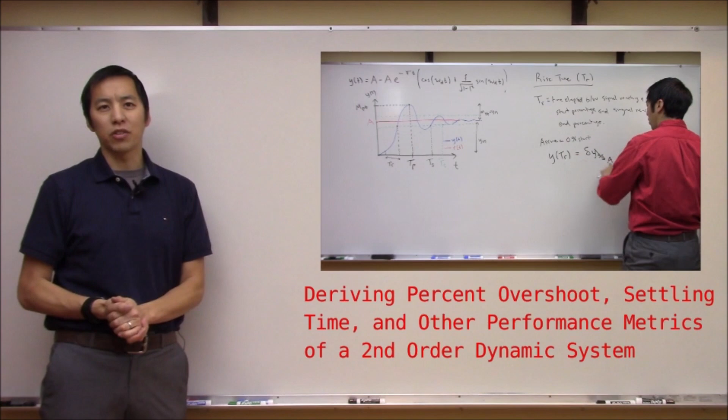of a dynamic system. If you've been following along with our series on controls, then you know that one of our previous videos actually discussed in detail the concepts of percent overshoot, settling time, etc. Therefore, if you haven't had a chance to watch this video already, I would recommend you stop, watch that video first before continuing with the lecture today. So, if all of this sounds good to you, why don't we jump over to the whiteboard and get started.

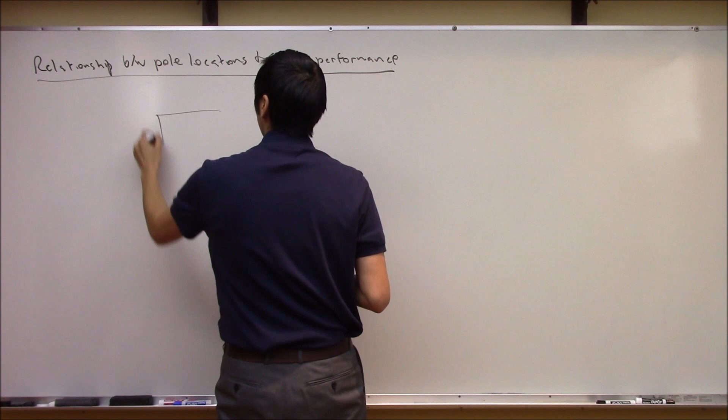Alright, so like we said here, the goal today is to discuss the relationship between pole locations and system performance. So the picture that goes along with this is, let's say you've got some plant here, or some dynamic system, maybe let's call it G of S, right? And there are some inputs here, U of S, and some outputs, Y of S, or time, whatever. If you want to look at this in the Laplace or the time domain, it doesn't really matter. But conceptually, what we see here is this system has poles here, right?

And if we were to plot these poles in a real imaginary plane here, in this complex plane, we understand that, depending on where the poles of this system are, they sort of affect the performance of this system, or what the output of this system does. So for example, if you had a pole here on the real axis, but in the left half plane, we know that thing is stable. And if we were to plot, very roughly, y versus t, we know that it would probably sit here and decay, right? And if the pole was even further in the left half plane, for a similar input, you would also get a decay, but it would probably decay faster, right?

Likewise, if the pole was, for example, exactly on one of these imaginary axes, let's say you had a pole right here, we know that the response associated with this would be something like pure sine waves, right? And as you move further down the imaginary axis here, or farther away from the real line, the same thing, you'd still get these cosine and sine waves, but they would now oscillate faster, right? And heck, we can combine this sort of behavior. Like if a pole was located over here, we would notice that you would get a decay, but you would get it in an oscillating fashion here, right? So this thing might look something like that.

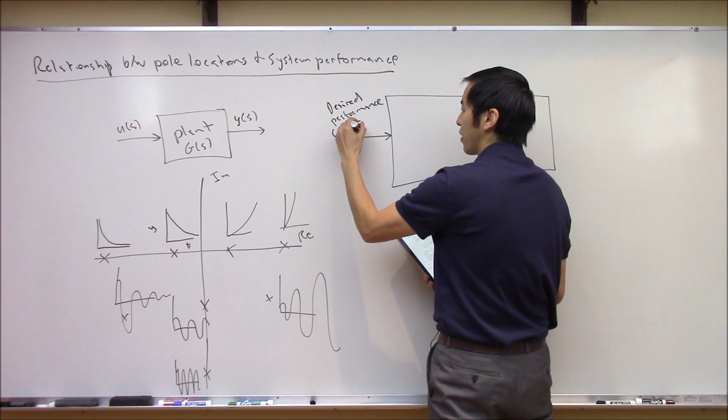So for example, your manager could come in here and say, you know what, your system had better have a specific percent overshoot, a specific settling time, a certain damped natural frequency, etc., right? These are all parameters or performance metrics which are easy to understand, what they do and what they actually physically mean. If they specify a certain percent overshoot, you know exactly what that system looks like, rather than this sort of hand-waving rough idea of how the system is going to respond, right? So these are high-level requirements that a customer or a client or a manager might specify to you. And what you need to do at the end of the day is be able to say, all right, if these are my requirements, what kind of requirements or restrictions are on the poles?

So in order to achieve this type of performance, you better make sure that the poles end up in a certain area, right? And this is what I'd like to talk a little bit about today. So you might think about this box here as basically transforming high-level requirements to technical requirements, right? So let's maybe write that down. So this is transforming

high-level requirements to technical requirements, right? So this is something that a customer might specify or a manager, and here's something that an engineer can deal with, right? So the reason why this is helpful, right, is because once you have this requirement on the

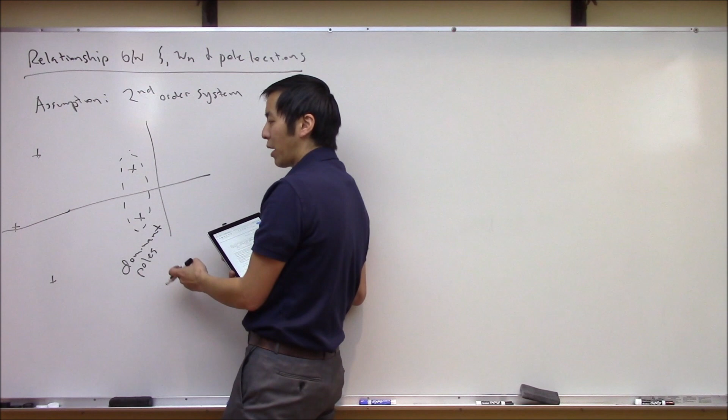Heck, even if it was a more complicated system here, right, where you had poles, and then you had more poles out here and things like that here. This might be, in this case, like a fifth order system that I'm drawing here. But if you think about this long enough here, a lot of the behavior is dominated by sort of these two dominant poles, which are closer to the imaginary axis, right? A lot of the dynamics associated with these poles, since they're so far in the left half plane, they're going to decay and settle very, very quickly. So a lot of the interesting behavior can be modeled by just a set of two simple poles here, right? So this is just a slight side note to say that this assumption is not as crippling as you might expect here, and a lot of systems can follow this analysis here.

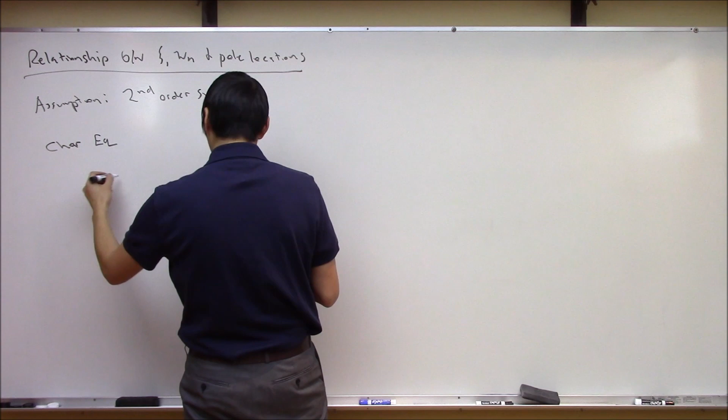So let's assume that we have a second order system. In other words, the characteristic equation for this thing can be rewritten in our standard second order form. I don't care what kind of second order system you have. You could manipulate it to basically look like s squared plus 2 zeta omega n s plus omega n squared is equal to 0 here, right?

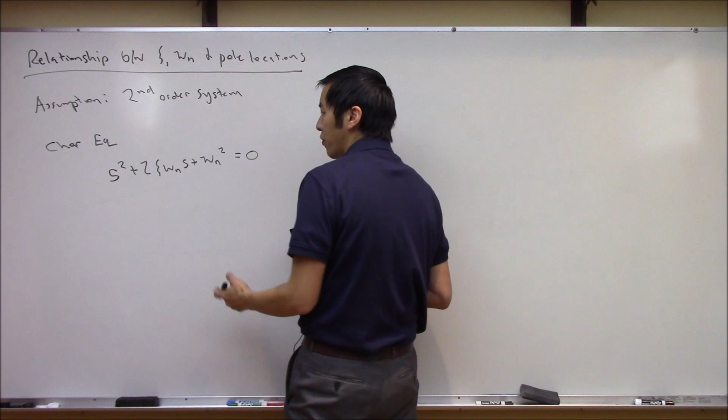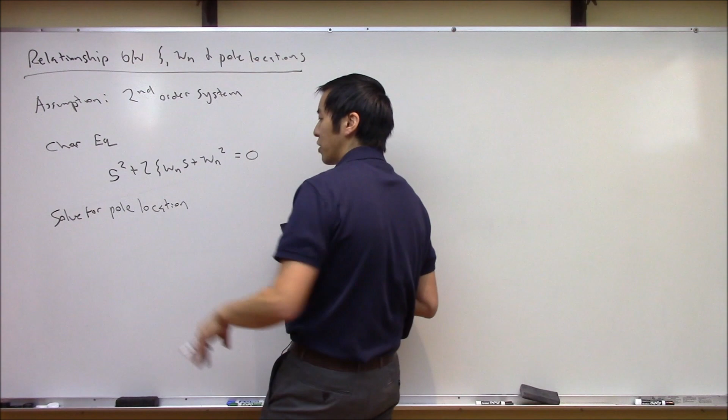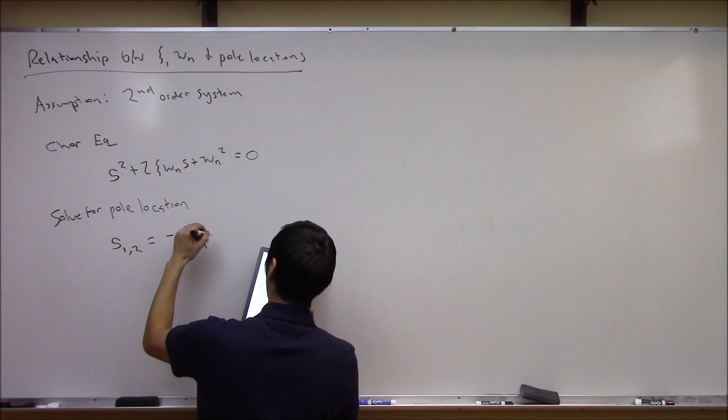Okay, so let's just go ahead and solve this thing for the location of the poles. I don't know how you want to do that. If you want to use the quadratic equation, or run to Mathematica, or do something like that. And we basically end up with two locations for poles of this system. Let's call them S1 and 2 here. You're going to end up with negative zeta omega n plus or minus omega n square root of zeta squared minus 1.

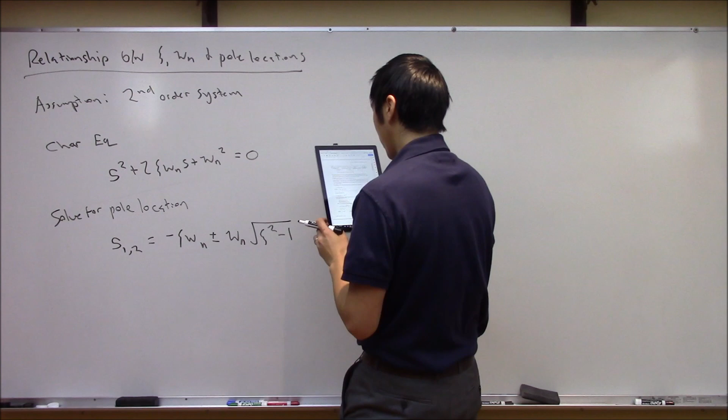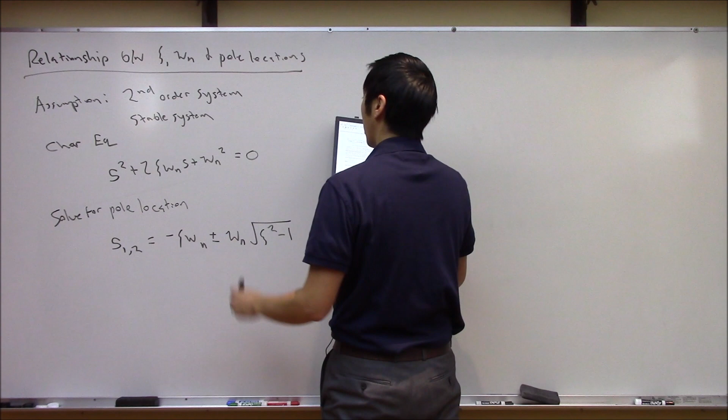All right, let's go ahead and add to our list of assumptions here. How about let's just deal with stable systems for now to make our life a little bit easier, okay? What stable implies here is that we're basically going to have to ensure that the combination of zeta and omega n is in the left half plane. So basically the magnitude of zeta and omega n is positive here. Therefore, the real part is going to end up over there in the left half plane.

Okay, and furthermore, let's go ahead and assume here that, shoot, I ran out of room in our assumptions. Maybe we should have put some bullet points here. Here's another bullet here. Sorry, this is not using the whiteboard space very efficiently, but let's go ahead and assume that omega n is greater than 0 here, and zeta is greater than 0 here. Well, tell you what, let's leave it like this for now. This should be fine, okay?

All right, so if that's true here, what we can do is rewrite this a little bit. We could write this as minus zeta omega n plus or minus omega n times square root of 1 minus zeta squared times i. All I'm doing is flipping the order of this, which pops out a -1 here. You can see that square root of -1 just turns into an i here. The reason we want to write it like this is because let's call zeta omega n sigma, the real part of this pole location. And finally, let's call omega n times square root of 1 minus zeta squared omega d, or the damped natural frequency.

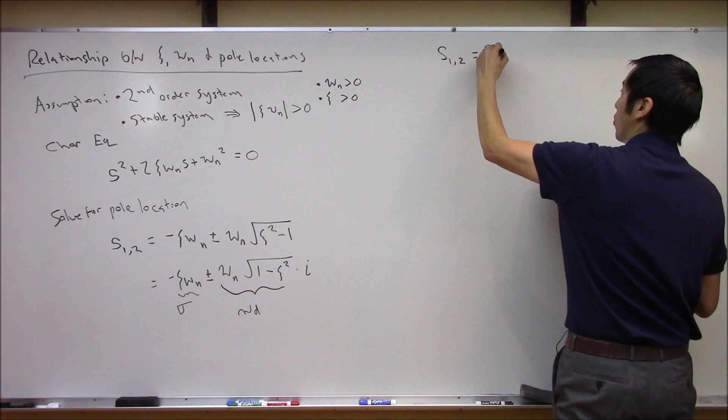So really what we end up with here is the pole locations S1 and S2, or some people refer to these as lambda 1 and lambda 2 for the two eigenvalues of your system. This thing could be written as just minus sigma plus or minus omega d i here. So in this case, like we said, sigma is just the product of the damping ratio and the natural frequency, and omega d here is omega n times square root of 1 minus zeta squared, right? Okay.

Okay, so graphically here, if we were to plot this in the real imaginary plane, so here's my real and here's my imaginary section. If I had two poles, let's draw them as x's, something like this, we see that this portion here is going to be at minus sigma, and then up here is going to be at omega d. So, again, you could kind of visualize this here.

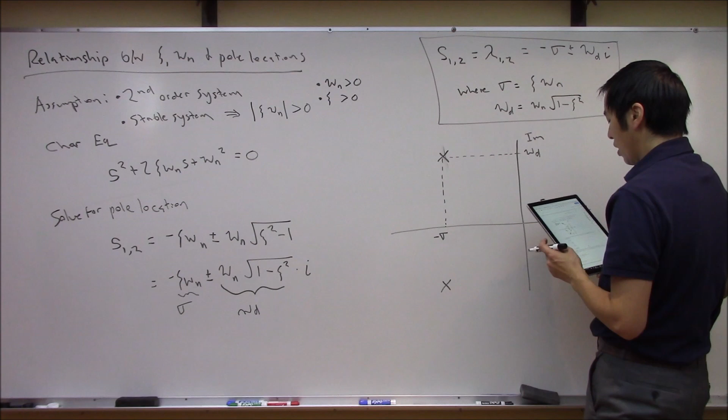Why don't we go ahead and draw a line here between the origin up to this pole, and we could think about extending this line maybe even a little bit further here. So what we might want to consider is that there's an angle associated with this. Let's call this angle theta here. So what I want to do is consider pole locations along this line at angle theta here. Maybe let's write that down over here.

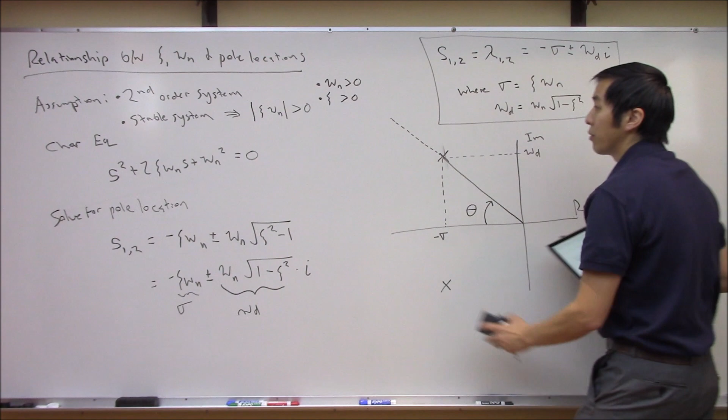Okay, so let's consider poles along a line with angle theta. If I look at any pole on this line, doesn't it satisfy the relationship for the tangent of theta? What is tangent of theta? Tangent of theta is the opposite over the adjacent. Well, what's this opposite side? You can see this opposite side, or the distance here, is omega d.

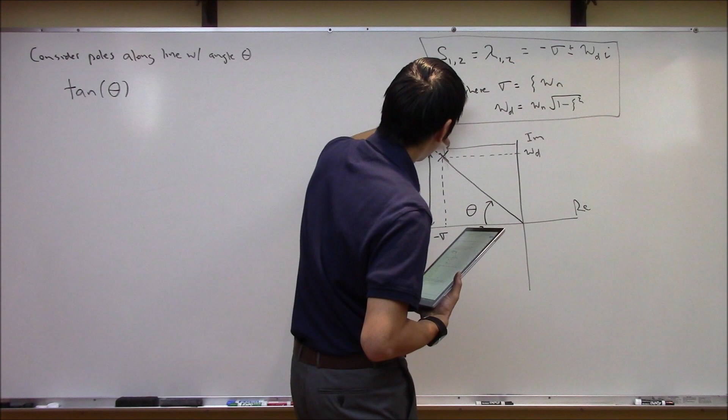And the adjacent side, or this length here, I guess it's easier to visualize if I draw it down here. This length here is just sigma. So tangent of this angle is just opposite over adjacent. So this is simply omega d over sigma. Plug in our expression for omega d, which we said was omega n times the square root of 1 minus zeta squared, all over our expression for sigma. Sigma is zeta times omega n.

So look at this, the omega n's cancel, and we end up with the square root of 1 minus zeta squared, all over zeta. This is equal to tangent theta. Or if you want to look at it this way, theta is just the inverse tangent of this thing. So we could also write theta is equal to tan inverse of the square root of 1 minus zeta squared over zeta. And hopefully some alarm bells might be going off in your head.

Usually when I see an inverse tangent, I always think about atan2 versus atan. Hopefully everyone is somewhat familiar with this concept of a four-quadrant inverse tangent versus a simple inverse tangent. In this case, I think a simple inverse tangent is going to work if we just look at things between 0 and 90 degrees. But if you want the entire spectrum of a full 360 degrees, you might need to be thinking about an atan2 instead of atan. But I think that's a little bit outside the scope of our discussion. All we're trying to understand is that you end up with this relationship.

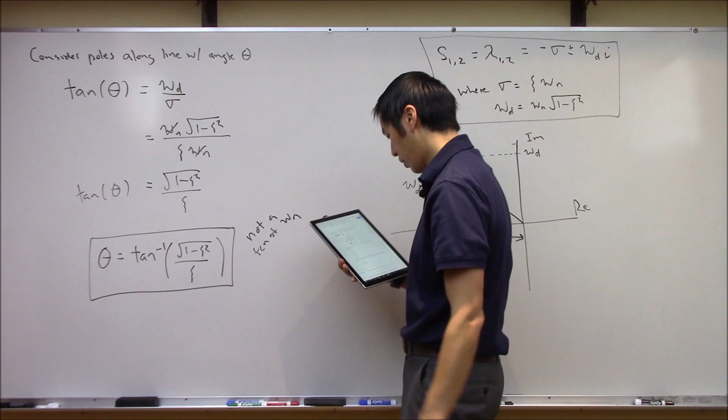Okay, so maybe we should box this up, and think about what this actually means. If you look at this long enough, what's interesting is this is not a function of omega n, not a function of natural frequency. The other way you can look at this is it's basically saying that any pole that's along the line theta has the exact same damping ratio. So maybe we should write that down right underneath it.

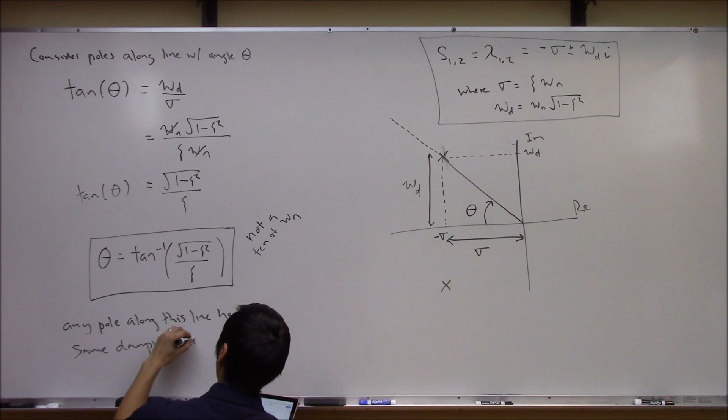So what's interesting about this is that any pole along this line has the same damping ratio, zeta. Or you can think about it the opposite way too: if you want a specific damping ratio, that is going to dictate an angle. So let's look at a quick example. Maybe we'll leave this picture up a little bit. Let me see if we can fit in an example here. What if you want a zeta of 0.707, which is actually 1 over root 2,

Okay, so that's interesting. Let's take this one step further, in the sense that we could now link this to percent overshoot. So maybe I've got enough room over here. Let's now talk about how to relate this to performance metrics. If you recall from our last lecture, the percent overshoot of a second order system is 100 times e to the minus pi zeta over the square root of 1 minus zeta squared. And what was also interesting about percent overshoot is that it is not a function of omega n. It only depends on the damping ratio.

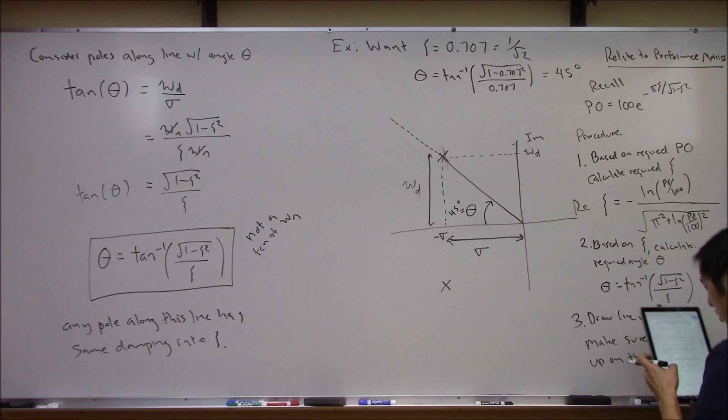Great. And then once you have that, step three is just draw this line. So draw a line with angle theta, and make sure that whatever controller or system you have, whatever way you have to move the poles, the poles end up on this line. So based on the percent overshoot, that places some restrictions on where you can be in the real imaginary axis.

What about settling time? Is there something with settling time that we can relate now? How does settling time affect the poles of a system? So let's go ahead and look at settling time. If you remember from our performance metrics, our time domain lecture, or the video I was asking everyone to watch earlier, the settling time of a system is negative natural log of the settling percentage delta all over zeta omega n. Now, we called zeta omega n sigma, the real part of the complex pole.

So let's rewrite this: settling time is negative natural log of delta all over sigma. Or if we wanted to solve this for sigma, sigma is negative natural log of delta all over the settling time. This is really interesting because your manager or your client is going to say, I need the system to settle in a specific amount of time, and I need to settle within 5% of my final value. So they'll give you delta and everything on the right-hand side. You can use this now to calculate sigma.

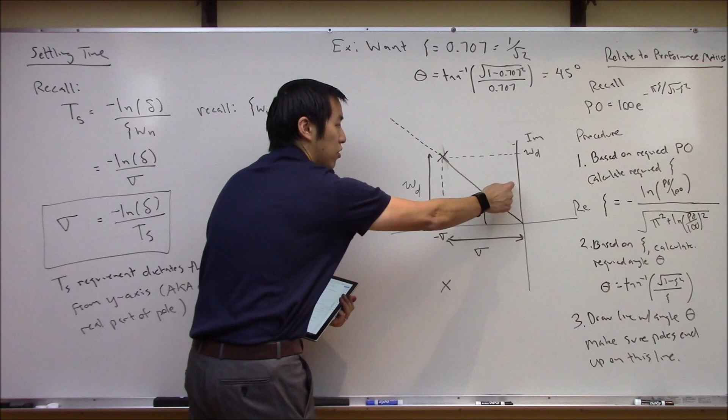What that means is that this places a restriction on the real part of the pole of your system. It doesn't care about the imaginary part. It just places a restriction on the real portion. So we can say that a settling time requirement dictates the distance from the y-axis, AKA it dictates the real part of the pole. The pole has to be a certain distance away from this imaginary axis. We're going to look at an example at the end to tie all this together, but I think this is hopefully a simple enough concept.

Okay, that covers settling time. Maybe let's come over. I wish I didn't draw this thing right in the middle of the board, it's kind of killing my space. Let's do it right here. Let's see if we can use this intelligently. Maybe I'll just draw a line. Sorry. Okay, so now how about natural frequency?

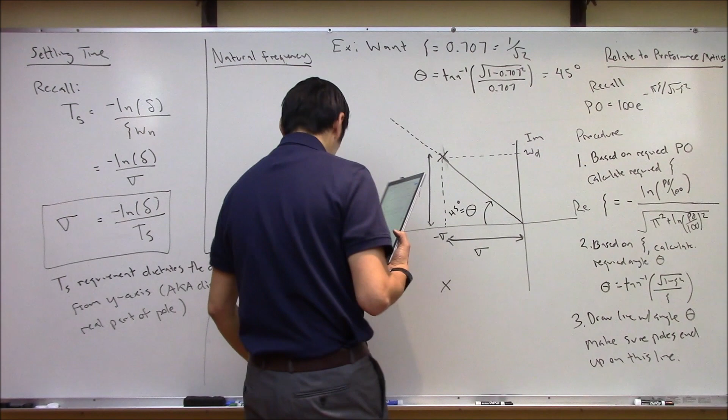What happens if you specify a specific natural frequency? What I'd like to do now is consider poles along a circle of radius r. So let's write that down: consider locations along a circle of radius r. Let's draw that in blue, and I'll try not to make this plot too complicated. Let me extend the axis a little bit. This circle has a radius of lowercase r.

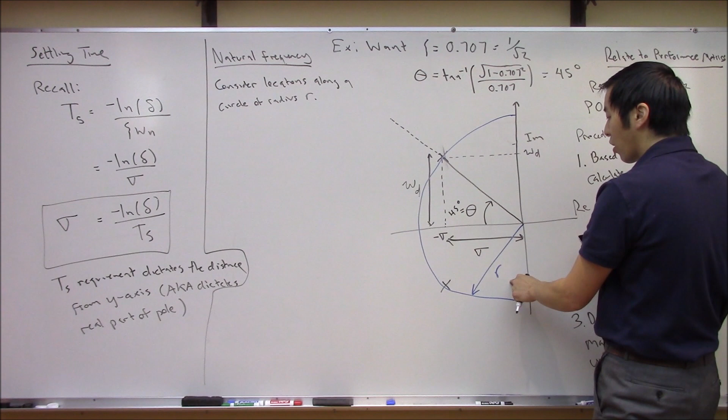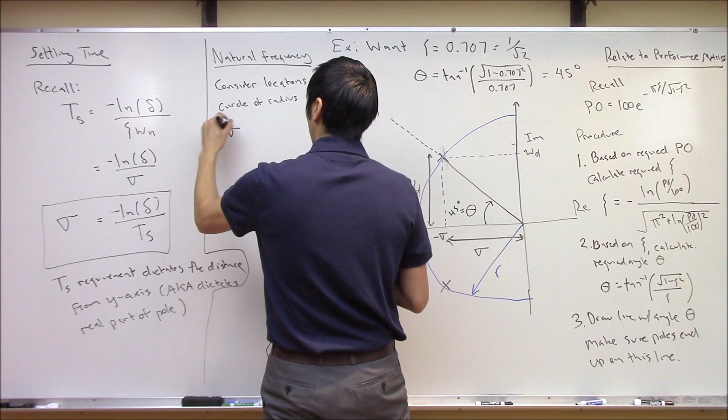So from geometry, if your pole lies on this circle of radius r, we can say that sigma squared plus omega d squared is equal to r squared. That's just the equation of a circle. Solving for r, we can write r is equal to sigma squared plus omega d squared, to the 1/2. If you remember, sigma was zeta omega n, so it's this thing squared, plus omega d, which was omega n times square root of 1 minus zeta squared, squared, to the 1/2.

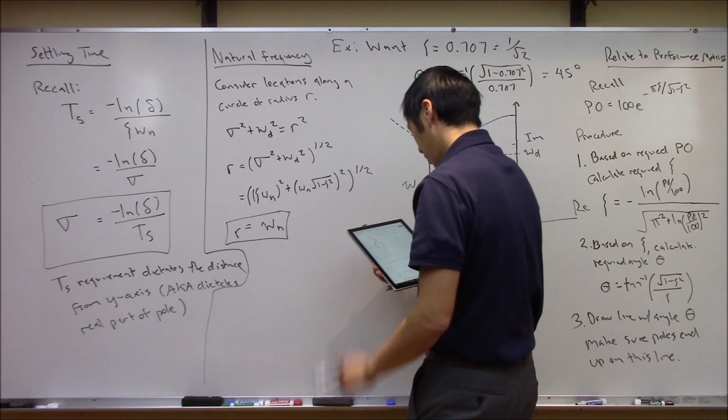Now let's distribute this through and simplify. This is a bunch of algebra at this point, but you know what happens? A lot of this cancels out, and what's really fascinating is you just end up with omega n at the end of the day. This is saying that any pole along this circle has the exact same natural frequency. We're not talking about a damping ratio at this point. It's just natural frequency related directly to radius.

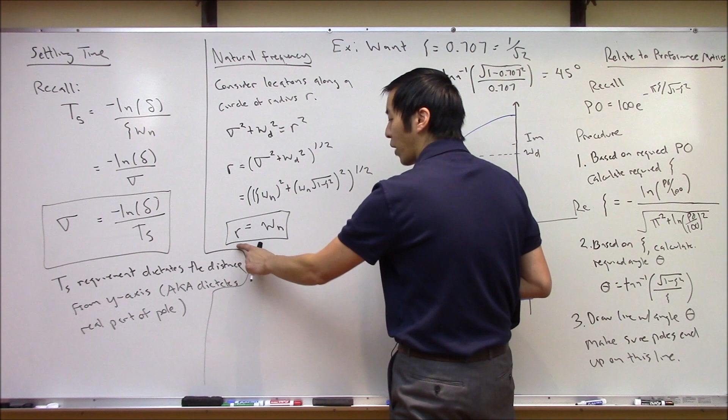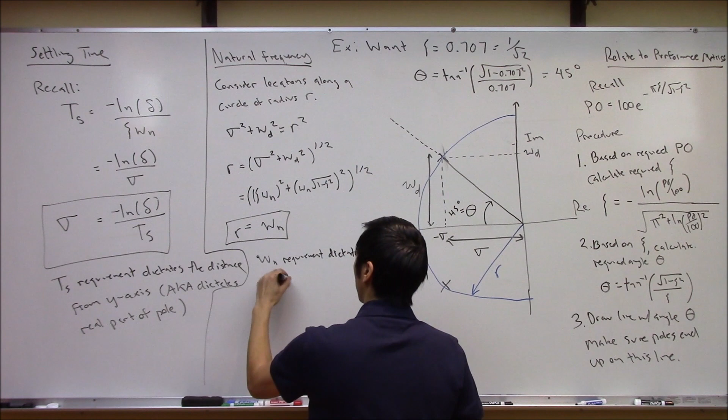So if your manager dumps a requirement and says the natural frequency of this system has to be 3 radians per second, what they're really telling you is that you need to make sure the pole is at a radial distance of 3 units. Let's write this down: an omega n requirement actually dictates the radial distance from the origin. So you see they end up being these circular restrictions. Cool.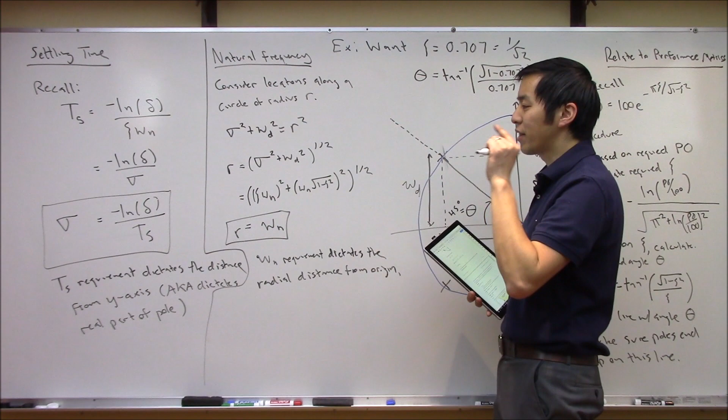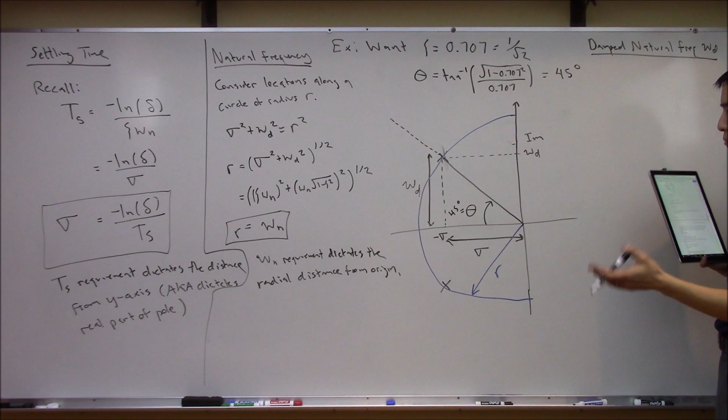Now, natural frequency is not actually the frequency that the system is going to oscillate at. We know that the damped natural frequency is the actual oscillation frequency, so let's consider that one next. Maybe we can come over to this far side. The last one, how about our damped natural frequency, omega d? This one's actually pretty simple, because omega d is the imaginary component of the pole. So from inspection, omega d is the distance from the x-axis, the imaginary component.

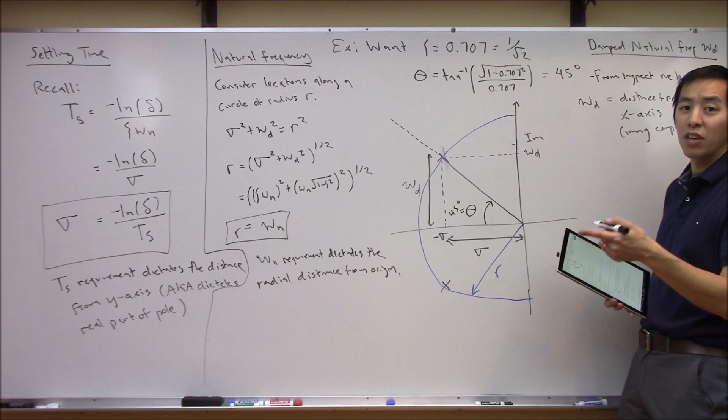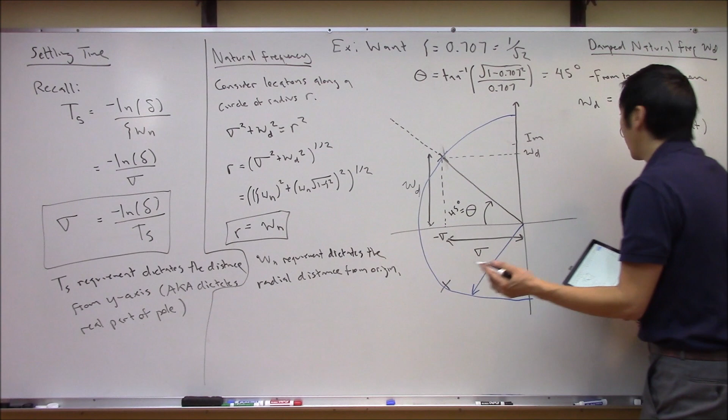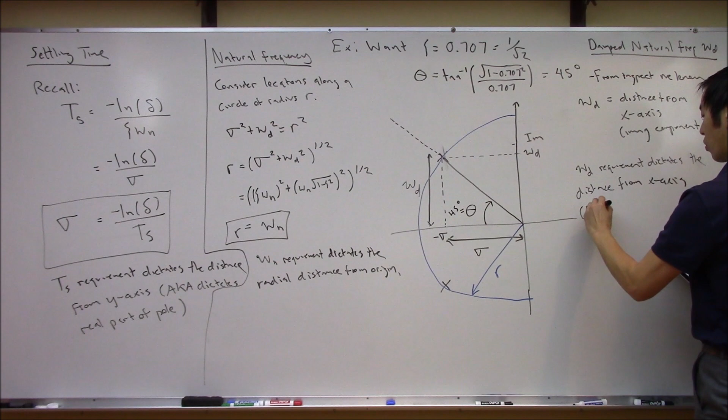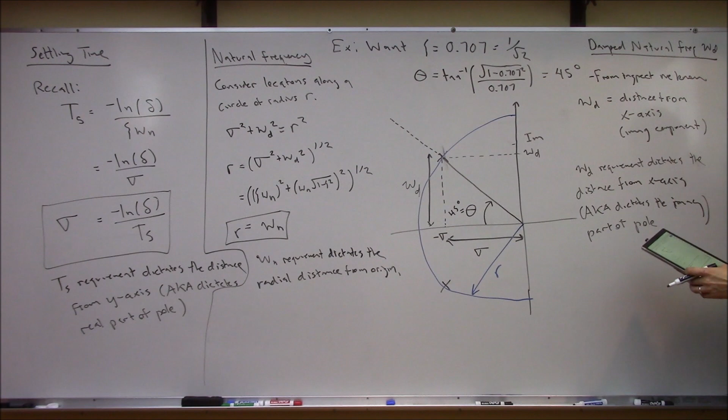If your manager or client says they want to make sure the system oscillates at a specific frequency, maybe they're making some vibration system that is trying to induce resonance at a very specific frequency, I'm making up some convoluted example, but if they tell you the system had better oscillate at 15 radians per second or you're fired, what are they actually telling you? They're telling you that the imaginary component of this pole had better be 15 units away from the x-axis. So an omega d requirement dictates the distance from the x-axis, in other words, the imaginary part of the pole. Fascinating, this is really cool.

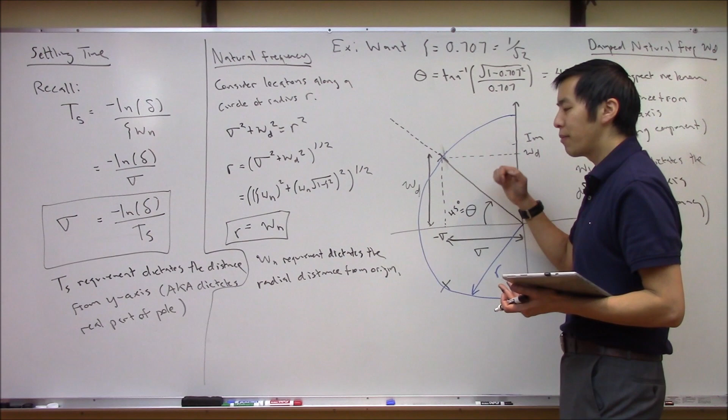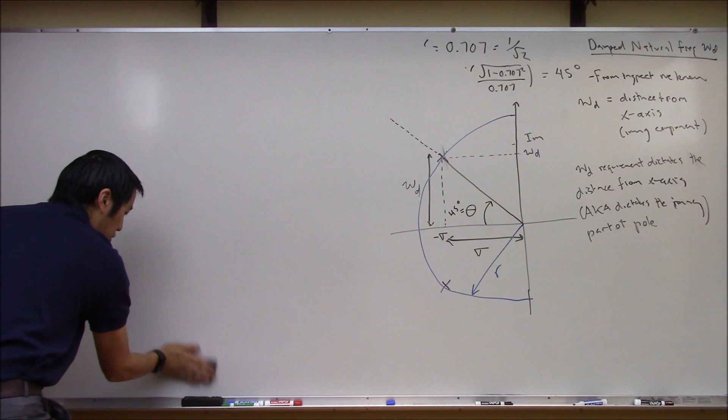So with this discussion, we now have a way to map physical requirements, like the percent overshoot, the settling time, the natural frequency, and the damped natural frequency, to where on the real-imaginary axis those poles had better land. Let's look at an example of combining all of these to see how we can use them simultaneously. A lot of the time you're not just going to get one requirement. Your manager's not just going to say to get the percent overshoot to be 13, but who cares about anything else. They're usually going to say: I need the percent overshoot to be 20, I need a settling time of 4 seconds or less, and this thing better not oscillate faster than a certain frequency. So let's look at an example of combining multiple requirements simultaneously.

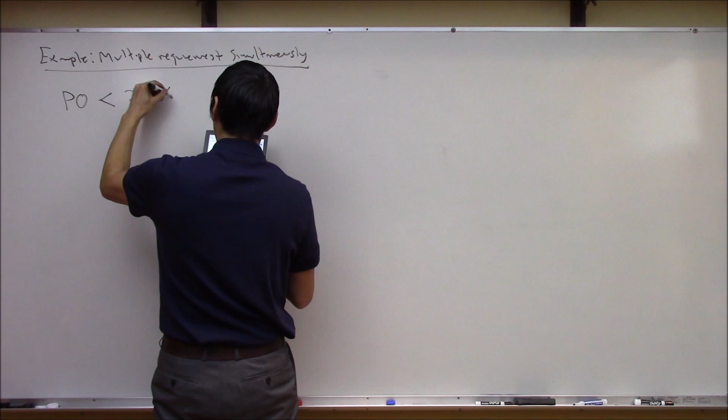Okay, so in this case, let's say your jerk of a boss gives you a bunch of requirements at the same time. They say, you know what, percent overshoot had better be less than 20%. And then settling time has also got to be less than 10 seconds, to within 10% of steady state value.

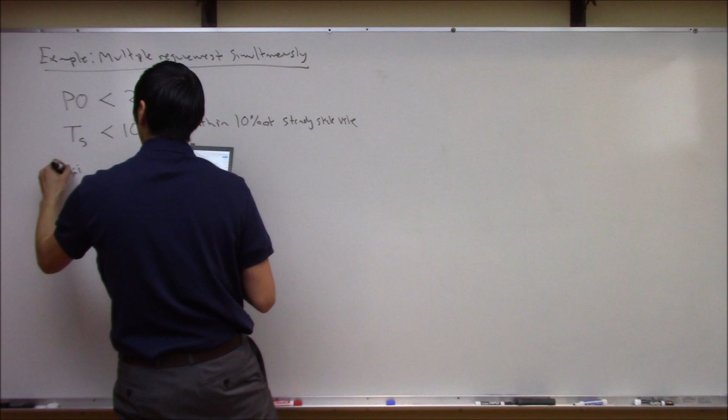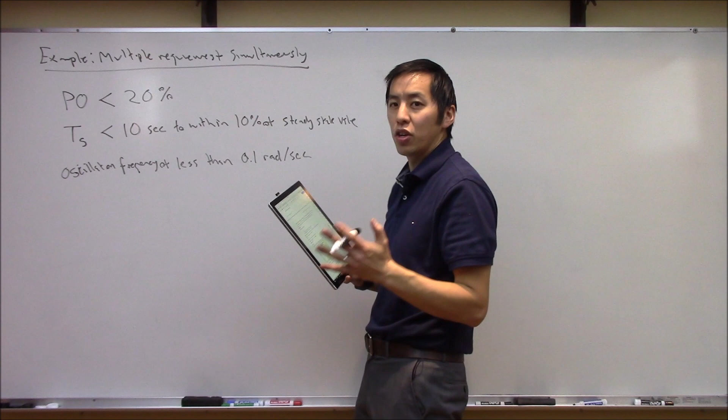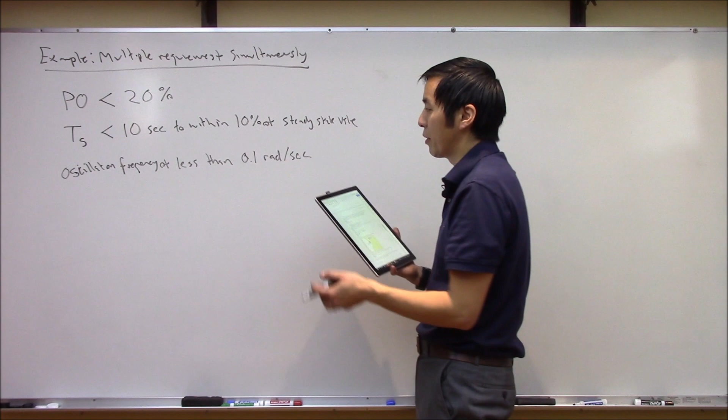And the oscillation frequency of less than 0.1 radians per second, right? So they give you all three of these and say, you better do this or you've got to start looking for a new job. So you're saying, oh, crud, well, I'm really glad I watched this lecture because now I'm going to save my job. So what we need to do is translate these high-level requirements into pole restrictions. Okay, so let's go ahead and do that now.

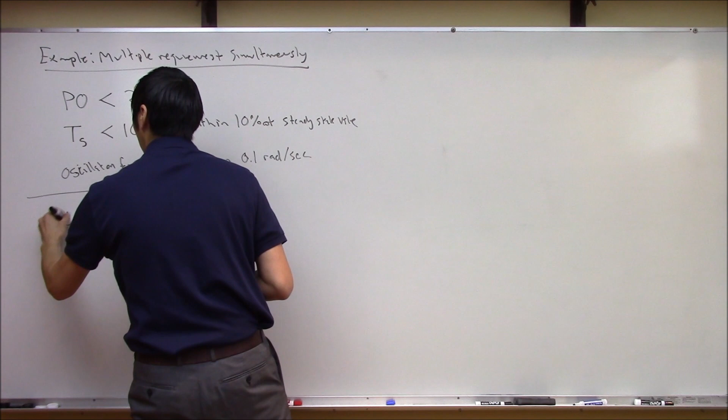So the first thing I would do is take a look at this percent overshoot requirement. We talked about this earlier. We saw that this percent overshoot requirement is really a requirement on damping ratio. So let's calculate the damping ratio that's necessary. We saw that it was negative natural log of the percent overshoot, in this case 20 over 100, all over the square root of pi squared plus natural log of 20 over 100 squared.

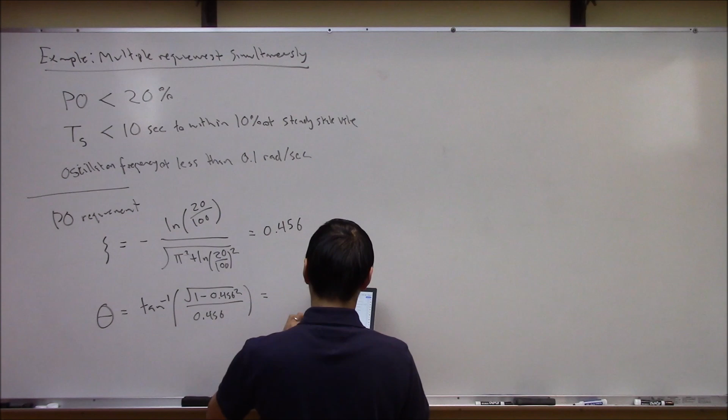Great, so you run those numbers and what you end up with is 0.456. Now that we know the damping ratio that's necessary, I can calculate the angle theta associated with this. Just to refresh everyone's memory, theta was tangent inverse of square root of 1 minus zeta squared, so 0.456 squared, all over 0.456. You run this and you get an angle of 62.9 degrees.

Okay, so let's draw ourselves a real imaginary axis here. Here's our real, here's our imaginary. Maybe let's do this in a couple of different colors. So in blue, let's draw a line on both sides, and this angle is 62.9 degrees. So this blue line is our percent overshoot requirement.

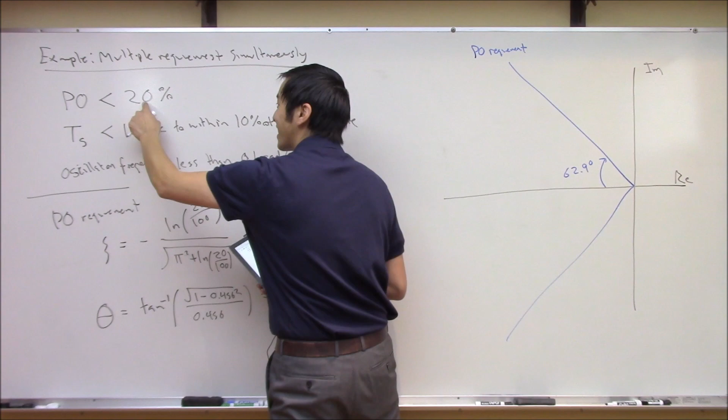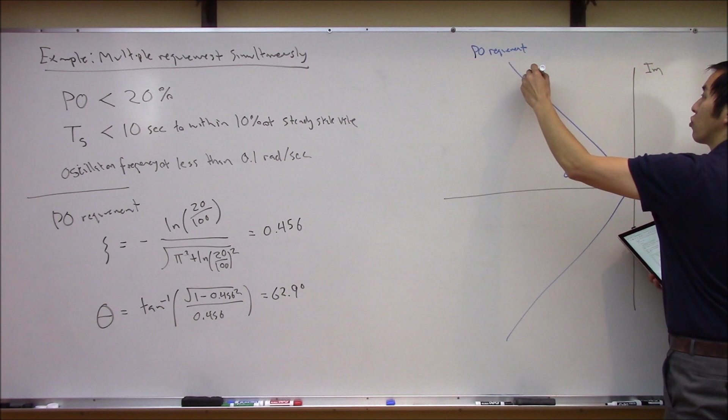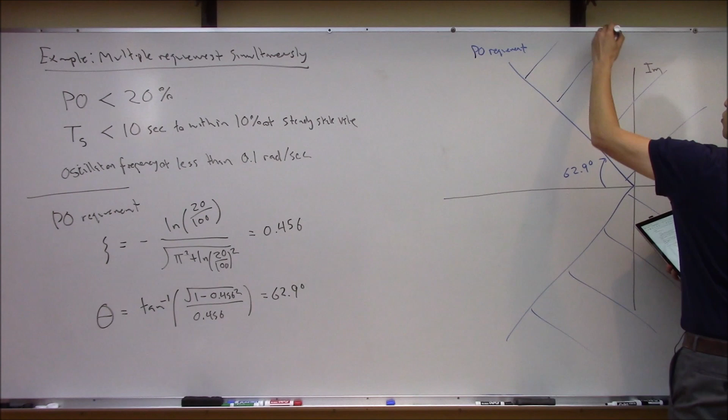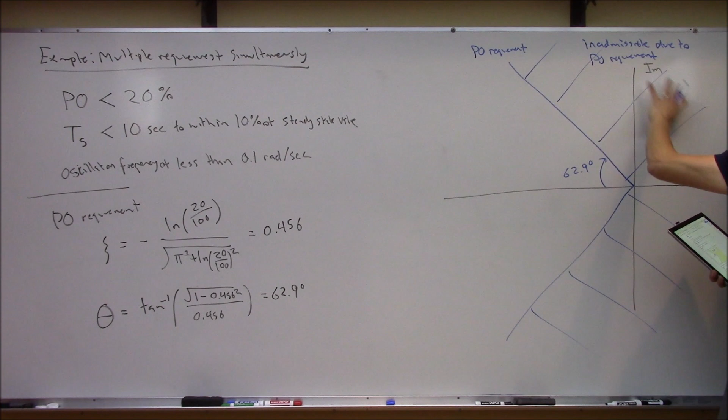Notice that we don't want a percent overshoot of exactly 20. It can be anything as long as it's less than 20. So if you think about that long enough, anything down here is admissible. If you go further out, you start getting into less. So this line represents exactly 20. Down here is okay, out here is bad. So let's draw some blue lines: blue means inadmissible due to the percent overshoot requirement. If you're in these blue crosshatched lines, you're fired. Okay, so let's keep going.

How about taking a look at one of our other requirements, our settling time requirement? Let's erase this. We discussed the percent overshoot requirement. So how about settling time? We said settling time has got to be less than 10 seconds. I think we saw earlier that this placed a restriction on the real part of your complex pole.

Actually, we solved this and saw that if we're considering settling time, the real part sigma had better be minus natural log of delta all over your desired settling time. In other words, minus natural log of 10%, so 0.1, all over our settling time requirement of 10 seconds. So this comes out to be 0.23. Okay, so what that tells us now is, let's draw that line here.

So there's a line here at x equals 0.23, so maybe something like this. Let me draw it in a different color here. And right here is 0.23. I guess technically negative 0.23, right? So this basically says that here's the event horizon. Anything over here should actually settle faster, right? Because you're getting further in the left half plane. So this side is inadmissible here, right?

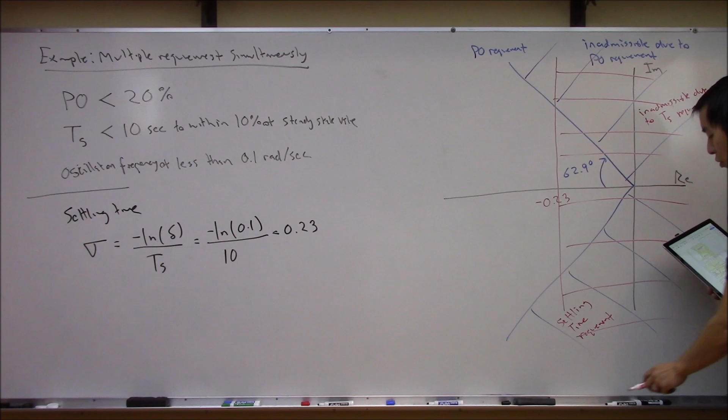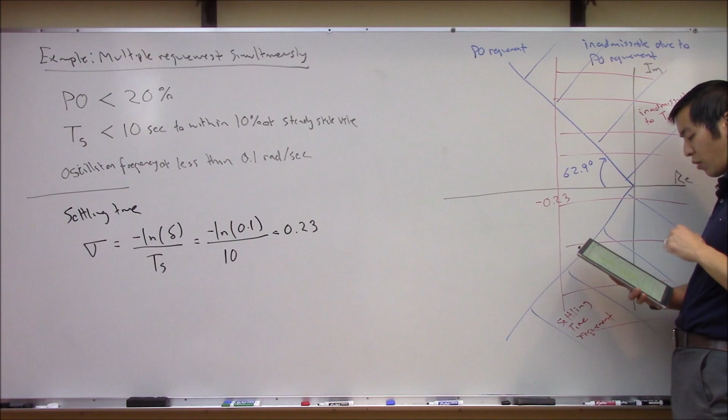Right? So this is actually getting fascinating here. Now you can see that this region here, this triangle, it would have satisfied the percent overshoot, but it does not satisfy the settling time requirement. So we have to stay in clear white space in order to simultaneously satisfy both the percent overshoot and the settling time requirement, right? Okay, let's do our very last one here.

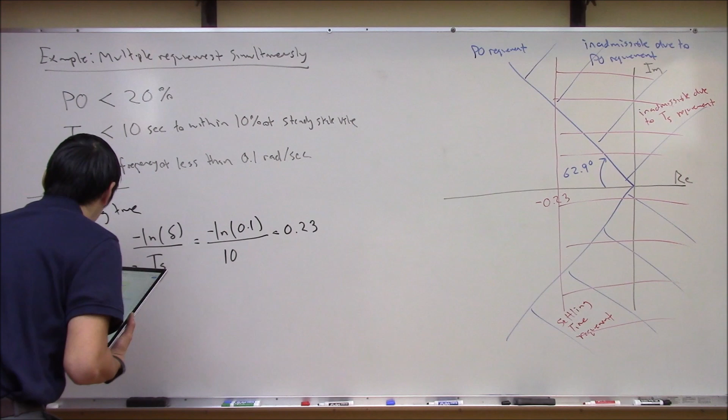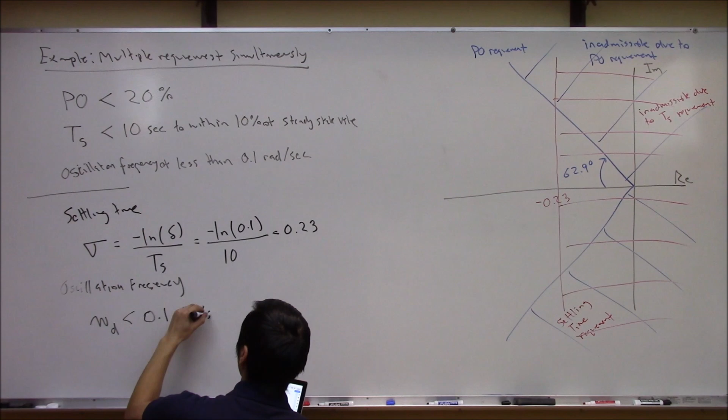We said the last one was this oscillation frequency here, right? And we said, again, that was pretty simple here. We said right off the bat, if you say that omega d had better be less than 0.1 rads per second, we saw that this was basically a restriction on how far away from the x-axis you are.

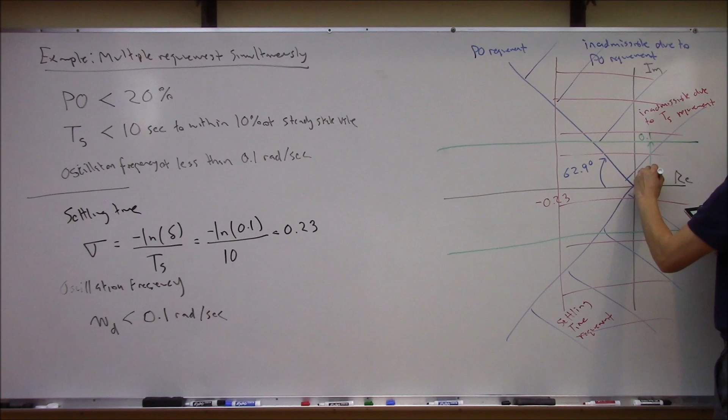So what we can do is let's draw it in a third color, green here, something like this. So I'll draw a green line here and here, where it crosses this line here at 0.1. Or you can think about it as this distance here is 0.1. So the green here is our omega d requirement. And again, if I want the oscillation frequency to be less than 0.1, I better be inside these two lines here. The absolute magnitude of the distance away from the x-axis had better be less than 0.1.

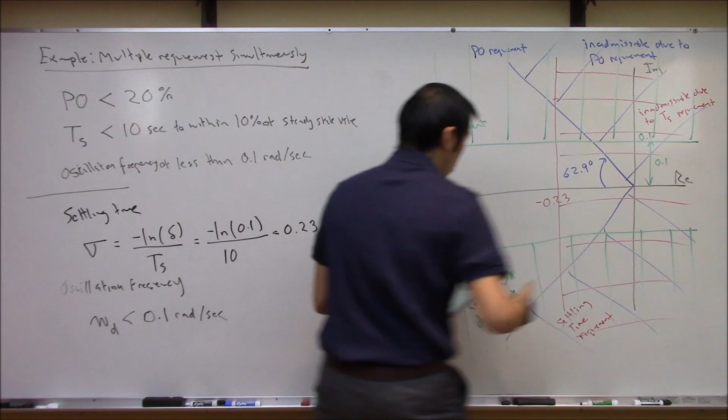So all of these green regions, these are all inadmissible because they violate our omega d requirement, right? So these green ones are inadmissible due to omega d requirement. So this is really fascinating here. We see here that by combining these sections of the real imaginary plane, we can find different regions which are admissible and not admissible in our section.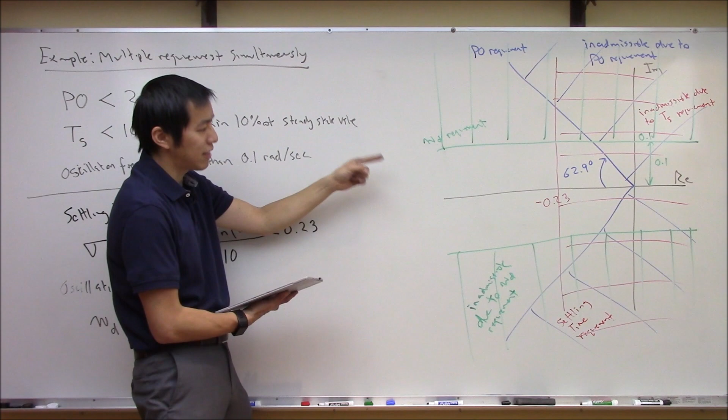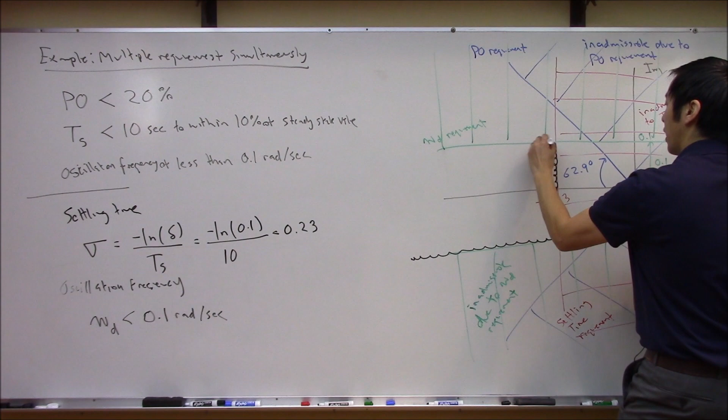So the only place here that we see that simultaneously satisfies all of these requirements is this purely white rectangle out here. Right? So let me write this down here. Maybe we can draw this in a, shoot, I ran out of colors. I don't have any more colors. Maybe let's just do it in sort of this squiggly line like this here. And I think actually if I had drawn this accurately, no, actually this is fairly accurate. If you plotted this out, it would be pretty good here.

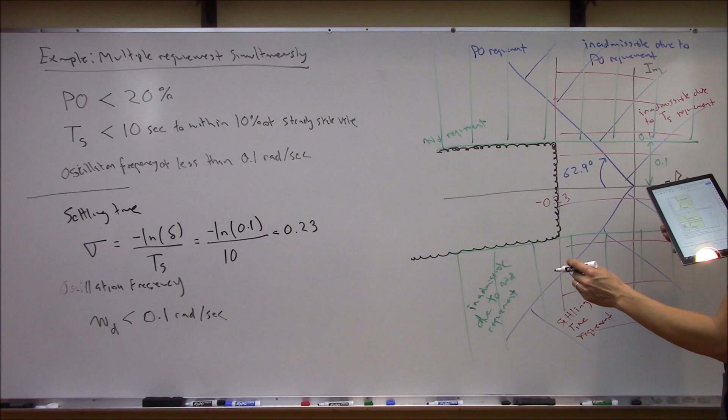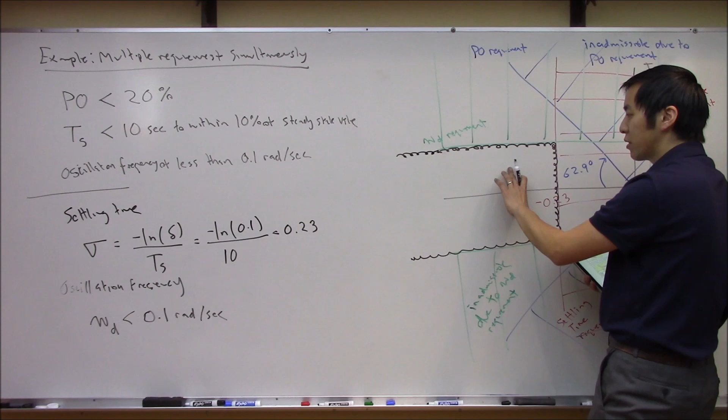So in this here, this white space is the only region, so you must make sure that the closed loop poles, however you're going to screw with your system here, you got to make sure they end up in this region here. So this white region satisfies all three requirements simultaneously.

And again, what's interesting about this is, you know what? The percent overshoot requirement is actually an inactive constraint in the sense that it's not limiting your design here. So the percent overshoot, we could have thrown that away by satisfying these other two. You automatically get the percent overshoot, which you kind of see graphically here, right? So this is a good way.

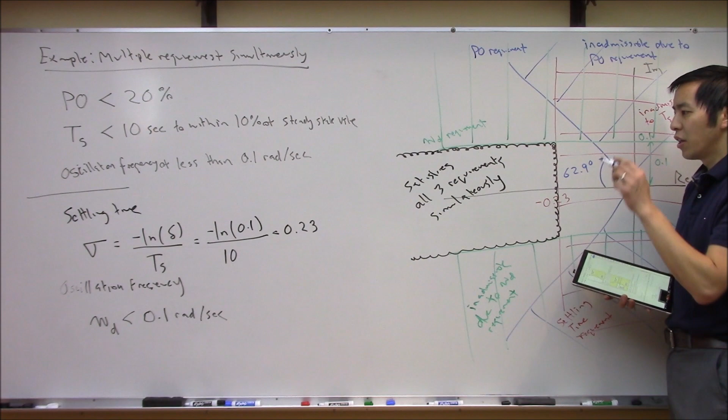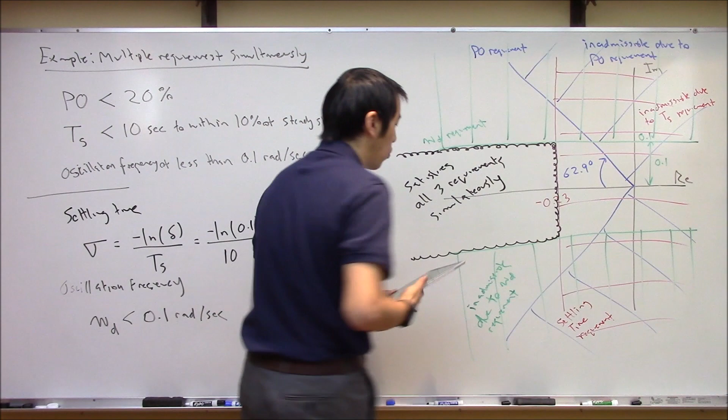Now I think we see that there is a way that we can link the performance requirements, these high-level things like settling time, oscillation frequency, percent overshoot, all that stuff, to actual locations in the real imaginary plane of where your system has to end up. So I think this is a good area to stop here. The next video, or one of the next lessons, let's finally combine this with a control design, namely say root locus or something like that, to see if we can use this in combination with a control synthesis technique to actually generate a controller for a given plant that will satisfy all these requirements simultaneously.